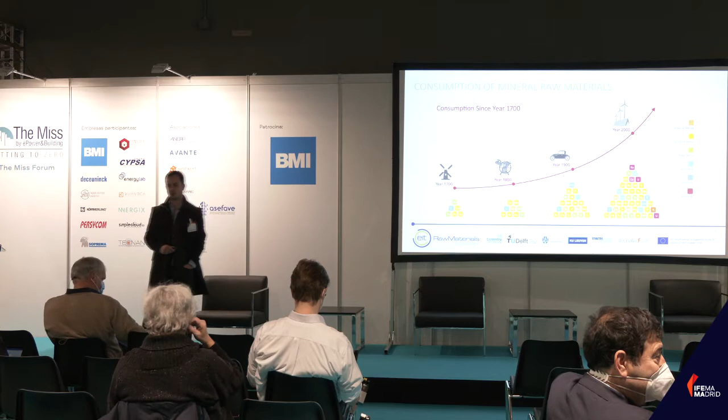I'm going to introduce briefly what the EIT RawMaterials is, what they do. Basically, it's an EU-funded program that wonders why raw materials are important for society and how we can keep them in loops of reuse. We can see that there's a huge increase in the consumption of raw materials in many industries, especially over the last 100 years. The more we develop new technologies, the more we rely on more and more diverse elements and materials to be able to work as a society.

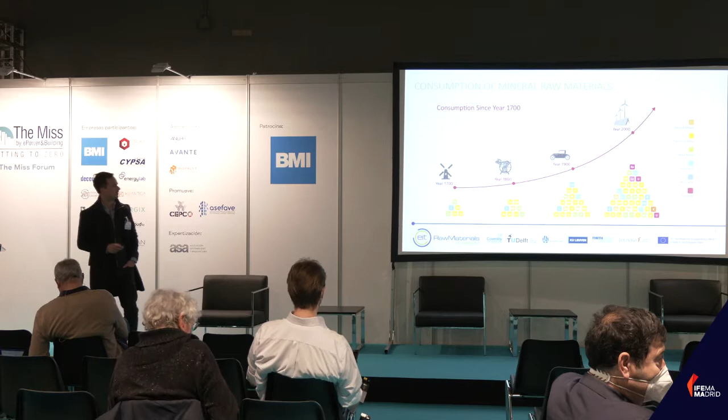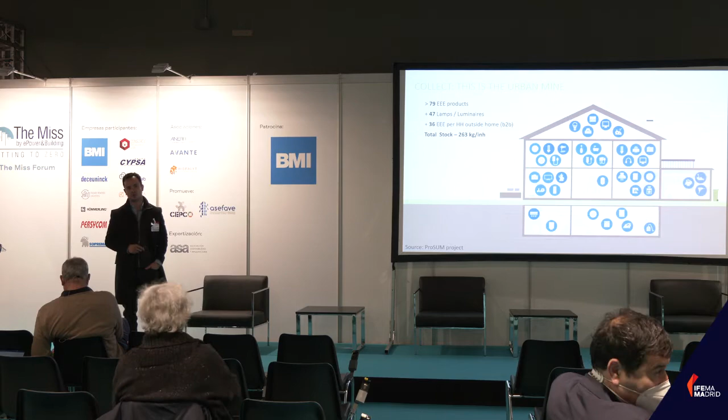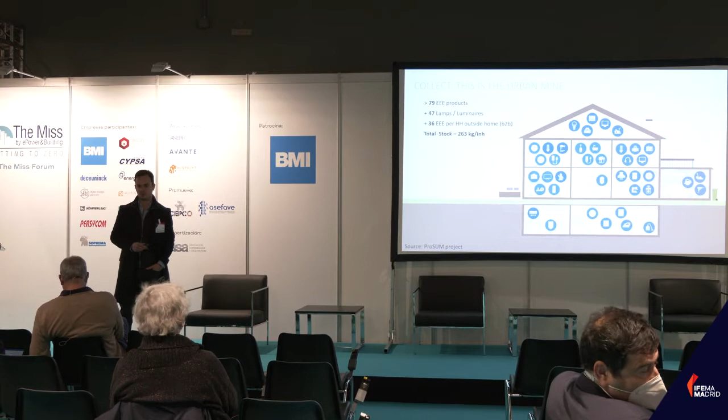This is, of course, no different in the case of construction and architecture. We see that all kinds of products which are currently embedded into our buildings are heavily reliant on a huge diversity of different materials, from low energy lamps to all kinds of electrical equipment, energy efficiency equipment, etc. Basically, we rely on more and more diverse materials and elements as time passes.

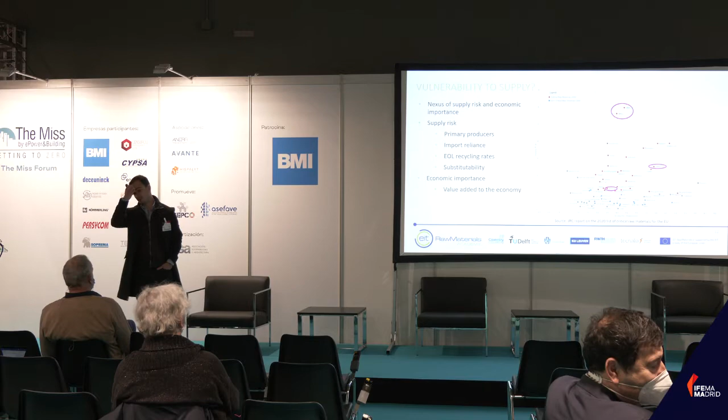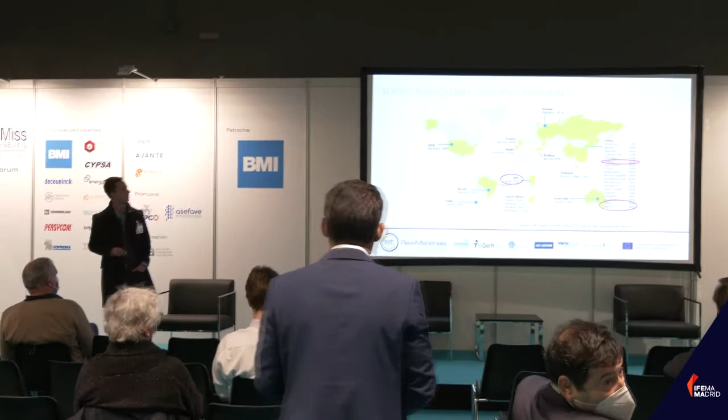Especially if we look at sustainability in construction, we see that many of the technologies we rely on for a clean transition require very specific elements - for example, gallium for solar farms, neodymium for wind farms, or cobalt for electric vehicles. All of these elements are in very specific supply, and limited also in terms of geopolitical regions. You can only get them in certain parts of the world, and they're very difficult to substitute. We highly rely on very specific places where these materials can be mined - cobalt is mostly taken from the DRC.

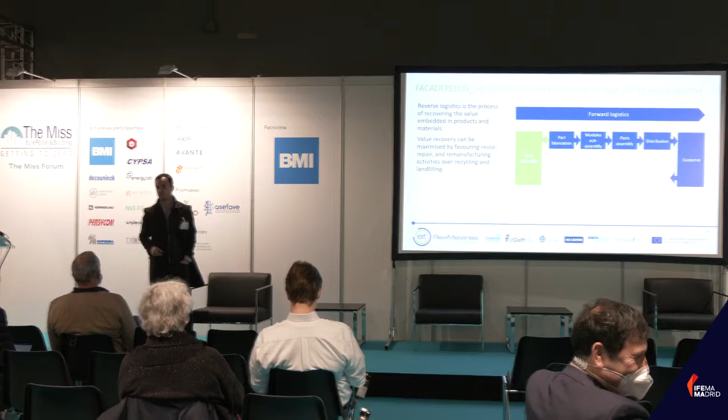And they are a very good party for funding all kinds of projects involving this topic. To go a bit into the FacadeReLog content itself, as Julian already showed, this is basically the forward logistics chain that we're already used to dealing with, in which you fabricate parts out of raw materials, you assemble into modules, then these are assembled into parts, which are distributed to the customer, in this case the construction industry in buildings all around Europe.

Reverse logistics is basically doing the opposite, so finding ways in which you can reuse components, repair them, remanufacture them, and recycle. Each one of these steps destroys more of the value in the component, so you really want to keep - if reuse, repair, or remanufacture are an option, you preserve more value. While recycling, you are basically breaking down the component into its essential parts, and therefore you have to invest a lot of energy into breaking it apart, and then a lot of energy bringing it back together into new products.

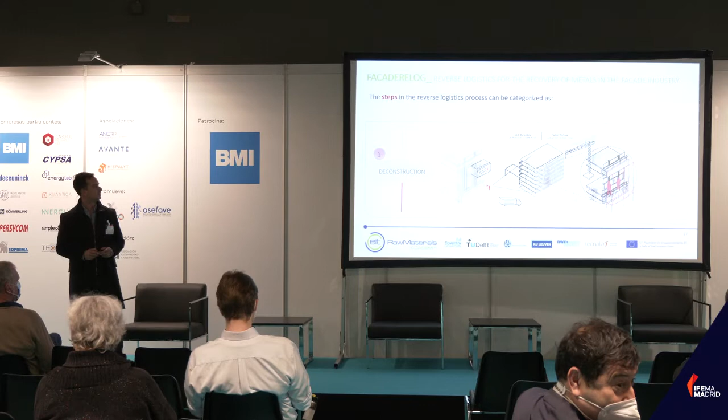The way these steps look in the construction industry is basically the deconstruction step, in which you go to the site, break the building apart into pieces, collect these components, and transport them to an inspection and sorting facility. Then in the inspection and sorting facility you remanufacture or repair them, and find a real-life option for them for a second generation.

Of course there's a lot of internal and external drivers and barriers to this change. In terms of opportunities, you have less impact on the world. You have new sources of revenue if you find new business models, for example. You save costs by being able to reuse your own components. On the barrier side, we have lack of knowledge and lack of standards for actually recovering and reusing these components at a high value. You have the additional effort required to collect and relocate these materials, which of course needs new types of supply chains.

Like the ones we'll be looking at today. And a lack of proper design, lack of incentives across the industry for different stakeholders. So it's really a whole set of challenges that have to be overcome, but also many drivers on the business side that can convince people to do it.

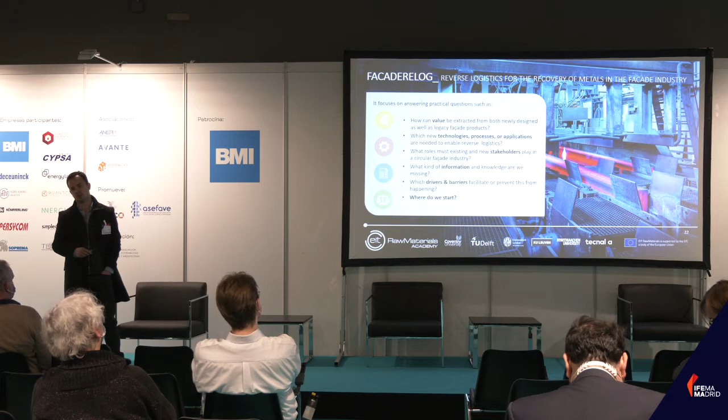So the way the course is organized, and how we'll be working over the next 2 days, is we will try to address many of the practical questions involved in this idea of facade reverse logistics. For example, from the financial aspect, how can you extract value from these products, and how can you make new value from reusing them? What kind of new technologies, processes and applications are needed and have to be developed to be able to reuse these components? What roles do different stakeholders have to take in a new circular facade industry? What kind of information do they need? And which drivers and barriers will lead these stakeholders to either play a role or not?

The program is divided into 3 main parts. The first is on circular building products and engineering, so the design and engineering aspects. The second, later this afternoon, will be on business and supply chain models. And the third, tomorrow afternoon, will be on life cycle cost analysis and evaluation, more on the environmental aspects involved. All of this has been done online in previous courses over the last 2 years, and today and tomorrow the idea is to bring all these topics together into one single session that combines all these aspects and perspectives.

And now I will give the floor to my colleague Tillmann Klein, who will talk about the design and engineering aspects of it.

So, thank you very much, Juan. Just to bring what we've said in the context of building products, I have some slides for you.

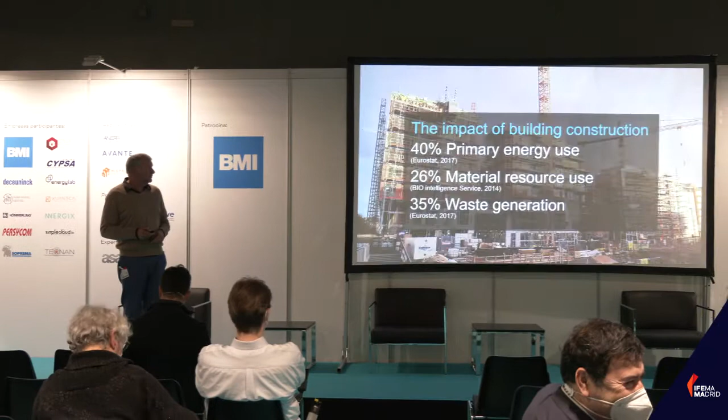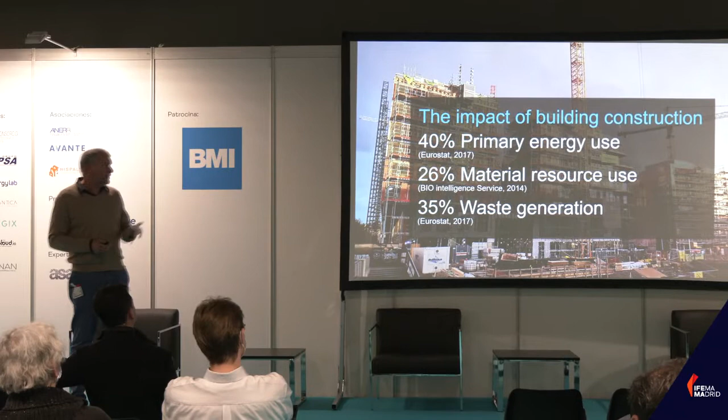The first thing to consider is that the impact of building construction is about 40% of primary energy use, 26% of materials resource use, and 35% of waste generation. Basically, buildings are stocks of materials, and a lot comes down to building products. That's where we implement the properties our buildings are going to have in the future.

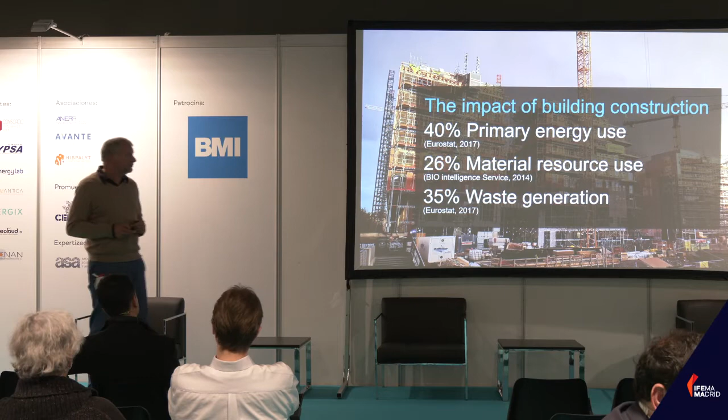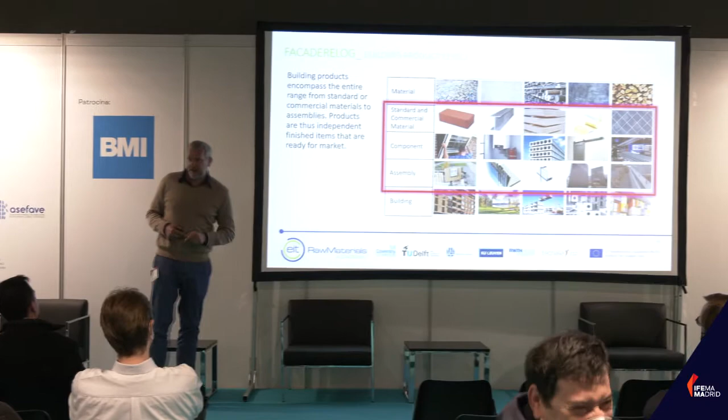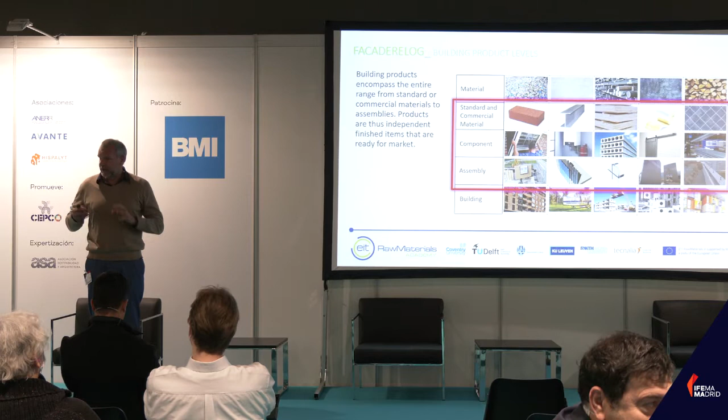So when we talk about building products, let me show you some slides so you understand what we define. Basically everything starts with materials, which are the base ingredient for construction. But in the building industry, we rarely work with pure materials, we don't work with steel or sand. We work with standard or commercial materials and components, like concrete, which is a compound of different parts.

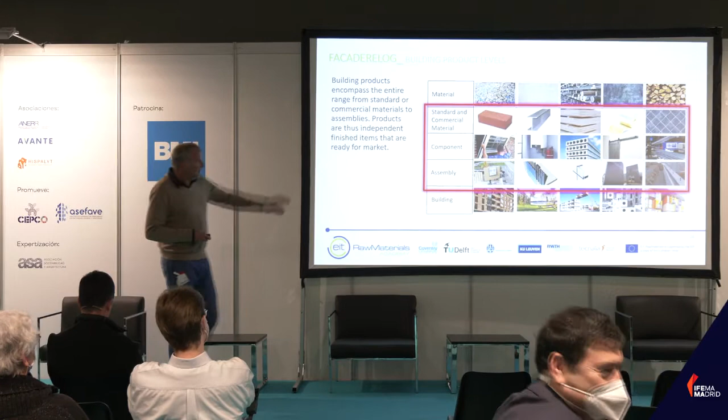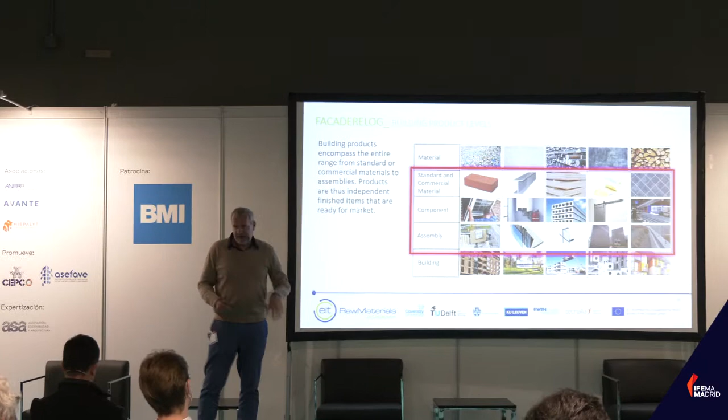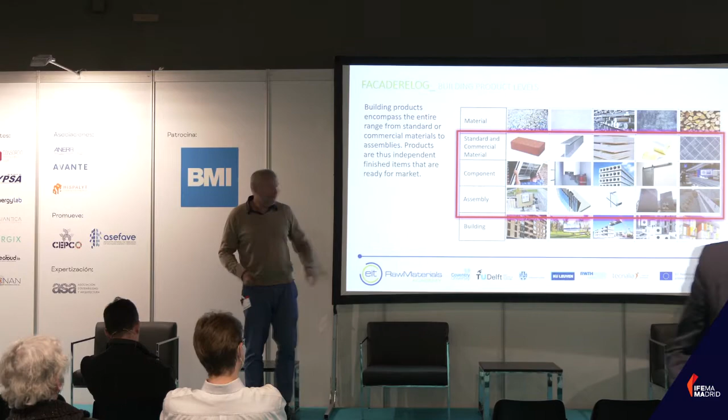The next level from those, we talk about components, for example a window frame, or installations. Then we also talk about assemblies, which is when we bring components from different crafts together into one, and there's the building level. So when we talk about building products at this scale, we talk about these three scales - basically systems prefabricated by the industry and offered to the market.

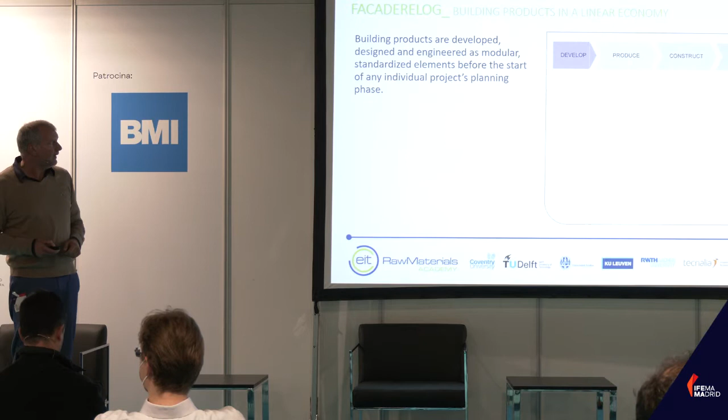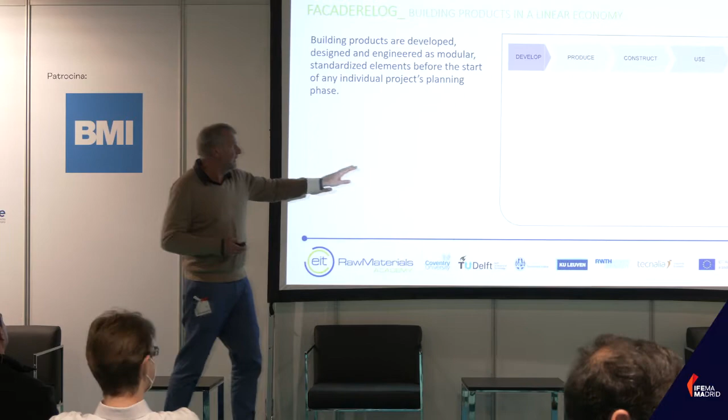So again, if you go to the standard life cycle stages, from production of buildings to construction, use, and end of service, this is where we develop building products. That's something done before the actual design of buildings starts, right? So products are made in anticipation of decision makers - architects, clients, anyone. This is basically what we want to focus on, building products, because here we implement circular strategies.

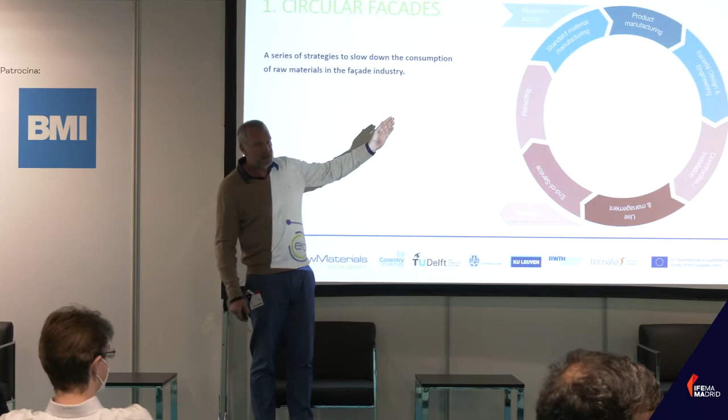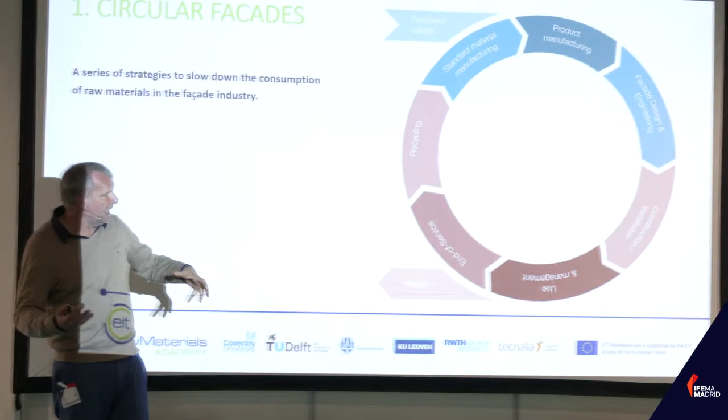Let's talk about circular facades. This is a cycle that Juan actually drew. Basically we have resource supply, then standard material manufacturing, product manufacturing - this is the pink part I just showed you. Facade design and engineering is done by engineers and architects. Then construction and installation on site, then use of the buildings, end of service, and normally materials get recycled or landfilled, and everything starts again.

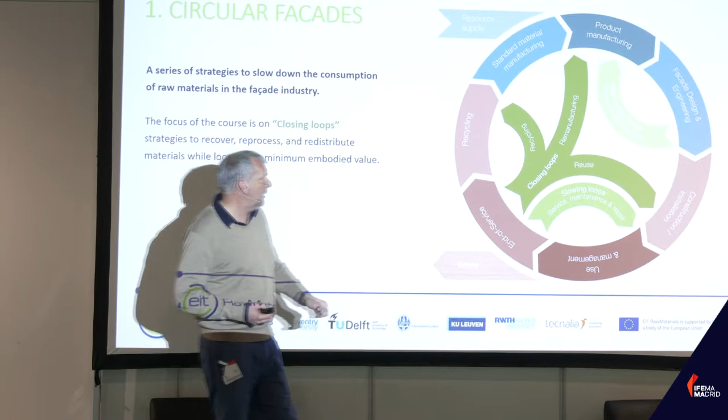So these are the strategies we're talking about with circular products - at end of service, recycled components, but we want to close loops in terms of remanufacturing parts, I have an example of what that means. In terms of reuse of whole components, we can slow the loops with better service and maintenance, or narrow the loops through better resource optimization. These are basically the circular strategies we want to deploy.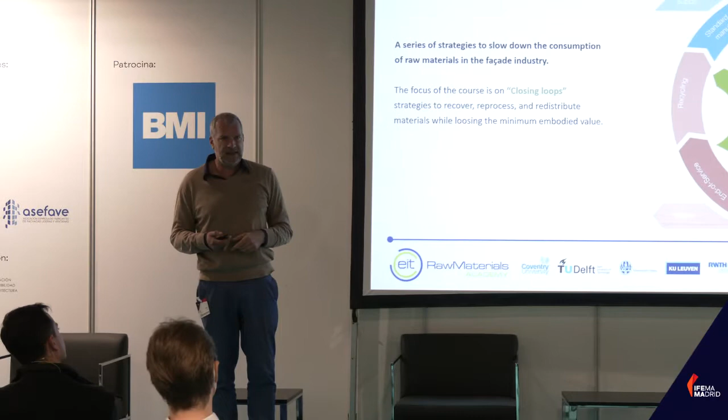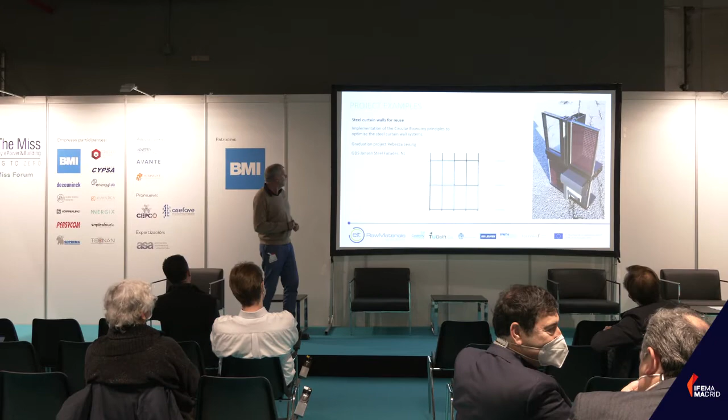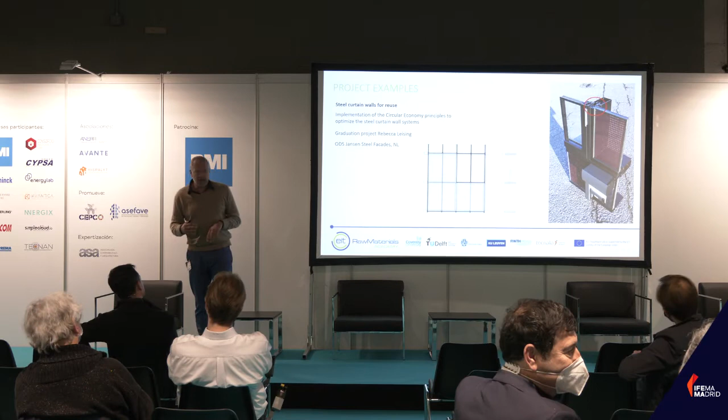Here are some examples, part of student work done together with industry. This one is with Jansen Steel. When they were looking at their system - this is a steel system they have - we redesigned it so that you can exchange infill components much more easily, and frames, while the main structure of the facade could remain standing for a future upgrade. They built a mock-up of it to test if it works.

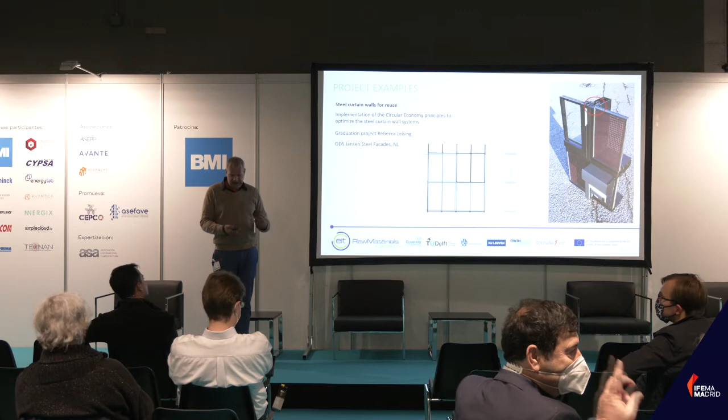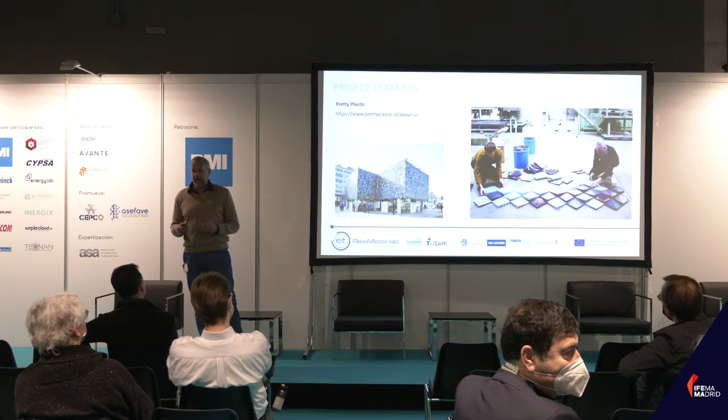Another interesting building product is from a Dutch company, Pretty Plastic, which makes facade tiles from recycled plastic, with a very interesting approach: collecting plastic, sorting it, cleaning it, color sorting, then using molds to press it again. This product itself can be recycled as well. I think this is one of the really circular products I've seen in the market, from beginning to end - made from waste, then can be recycled and reused. It's a very interesting approach, and they are scaling up, with the first buildings now on the market.

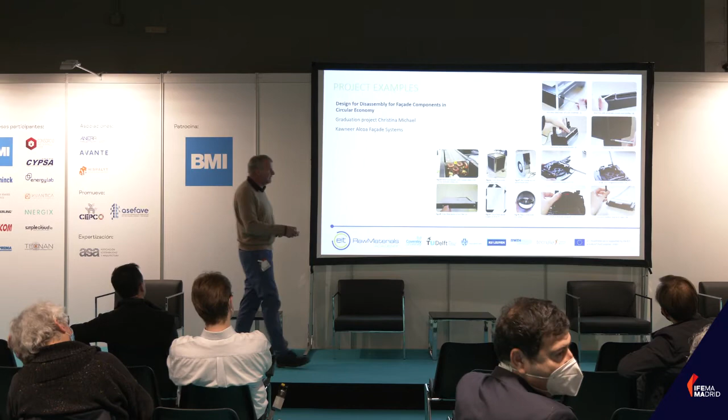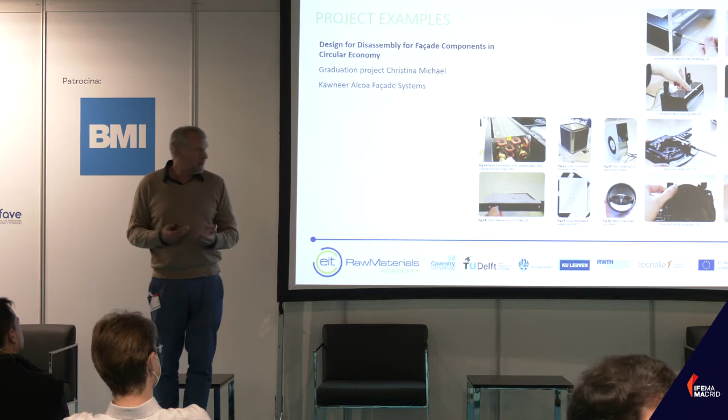This is another experiment we did with students, in collaboration with Kawneer, a facade systems company, and other suppliers, looking at the idea of remanufacturing. What that actually means is you take your product apart and identify which components you can reuse at a high level, remanufacturing them to as good as new. For example, this is a sun shading system - when you take it apart, most of the components can go on to a second life. What needs to be exchanged is the screen itself, and the engines need upgrading. So remanufacturing is a very interesting theory for the facade industry, to look at what components can get multiple life cycles and basically last forever.

So that's it for the introduction. We've covered the basics, and now we have prepared a little workshop based on case studies. Juan is taking over again.

I'm sure you can hear me. I think because we're quite few in the room, maybe we can just go for direct questions. If any of you have questions, it can also be in Spanish. Awesome, we can just have a small conversation here with the people that are here. Or are you interested in some exchange, or do you need to go on to the next session? I think it's basically only here.